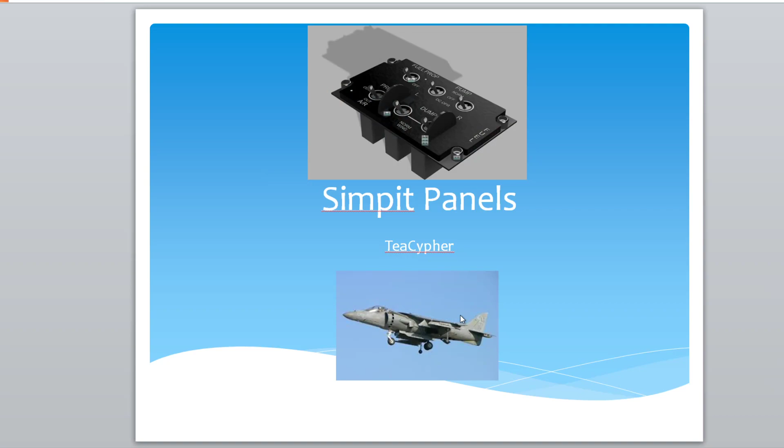So, what we're going to be looking at. Just to recap, we're working towards creating a Simpit panel, and this is really just about teaching you some of the principles of design and sizing and such like, and how to read some documents. So this is our target: I'm doing the AV-8B Harrier for DCS. So going forward, this is what we looked at last time. We looked at what I considered the Bible back then, and just looked at some of the research. And then this time we're looking at the actual metal plate.

Okay, so for starters, I would like to just make some clarifications and amendments to the previous episode. After some feedback from various users on DCS Forums, they brought to light some problems with the Bible document I've been using, as shown here. I still fundamentally think it is a good document. It's just got some errors in it, and part of that is down to, put simply, it was written by someone who works in metric and didn't get the conversions across.

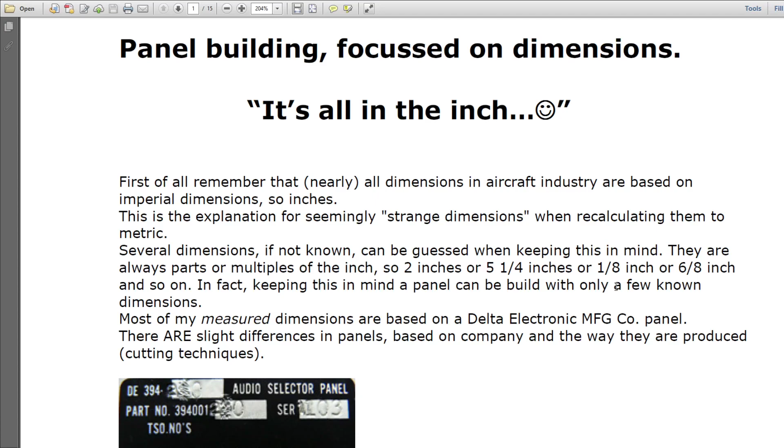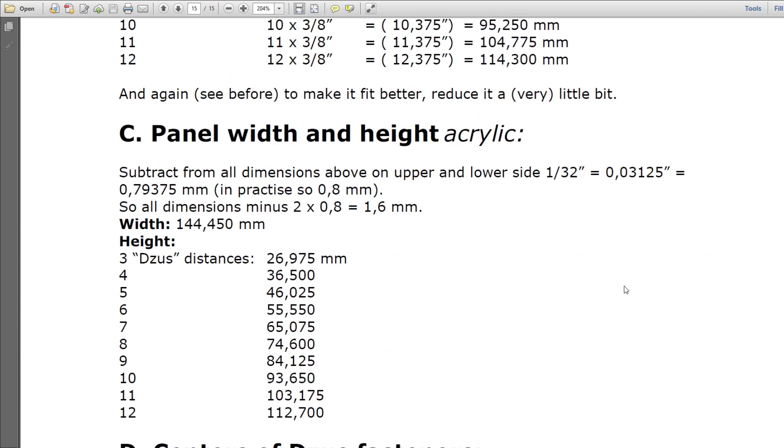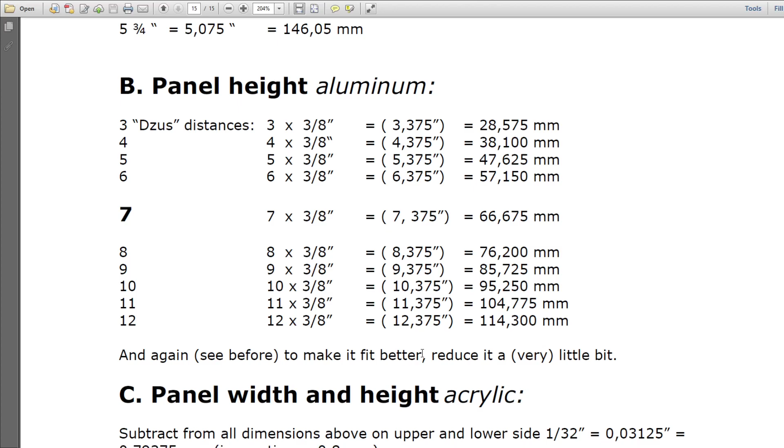So the big ones that I've noticed, and I'll go into detail why I believe there to be errors. If we go right down to the bottom where the appendices are, 3/8, there's a problem here. If you look, he's gone 4 times 3/8 and given a result of 4.375 inch. That's incorrect. That's an error in the maths. These numbers here are correct. Okay, so the actual metric values are right. It's just the imperial values here are wrong.

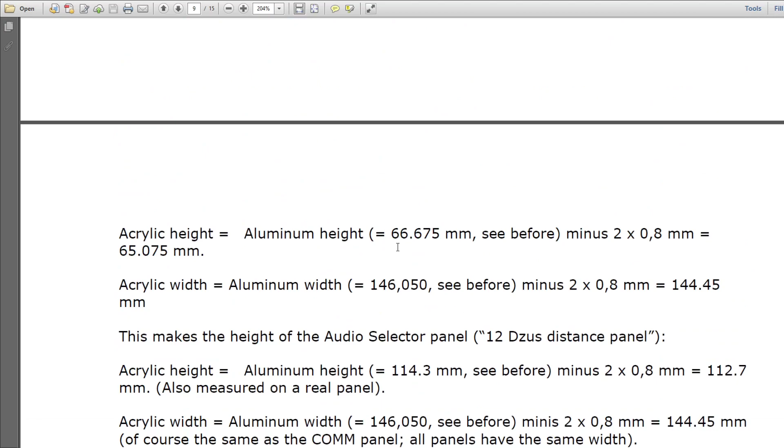Also, I've found that there is a discrepancy between the suggested width of the holes against the mil standard, and I'll show you the mil standard in a minute. Yep, so this value here doesn't quite work right. So I'll bring you next to the mil standard. So this is the mil standard that is for the design of panels.

And as I said, I've had feedback from other users, people who've got hands on real panels in America. I will say that in the UK it's very hard to actually get hands on panels, I find, and particularly the AV-8B Harrier, there's maybe 3 of them in this country, and most of them are hanging off roofs, and you just can't get into a cockpit to measure anything and do any direct real measurements.

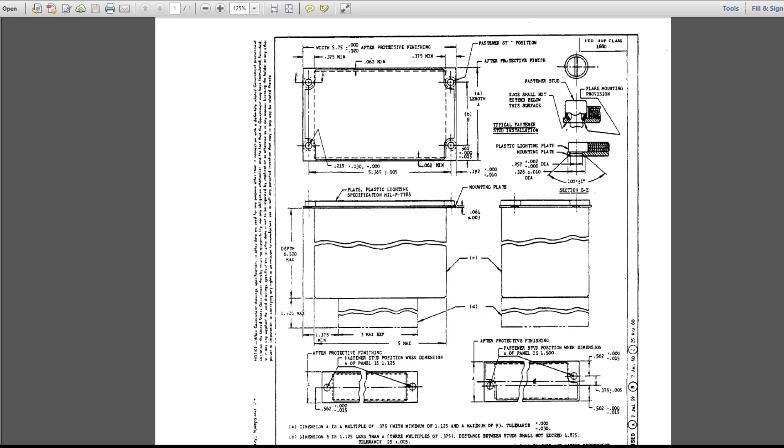Okay, so this is the actual mil standard. It's mil standard MS25212 Charlie. This is actually a rescinded document now, so it's no longer up to date. As you can see, it's okay. It's not the best of quality though. So what I've done, for my purposes and to be friendly to the community, I've metricized it here. Okay, and some of the main things to notice is this after protective finish, just how you read a technical drawing. By trade I'm a design engineer, so technical drawings are my bread and butter.

You'll notice you've got 2 numbers here, 146.05 and 145.542. That means the dimension can be anywhere between those 2 values. In the original document it talked about a width of 5.75 plus 0.000 minus 0.020, so that's why this 146.05 is actually 5 3/4 of an inch.

Yep, and the other very important thing to note is this after protective finish. So this value here is after it's been painted, it's got a protective layer on and everything else. So when we're dimensioning, we need to make sure we have smaller dimensions so the paint and stuff doesn't go beyond this region. Talking to my contact, he tells me that the measured width he normally reads is 5.74 inches, which is less than the 146.05.

So on this side I've done a reference to the original mil spec. I've copied the stuff for the plate itself. I've not worried about the actual depth of the boxes or anything like that. If you really want to go into that, you can go to the original mil spec and have a look at this. I will hopefully put a link to both these documents in the description.

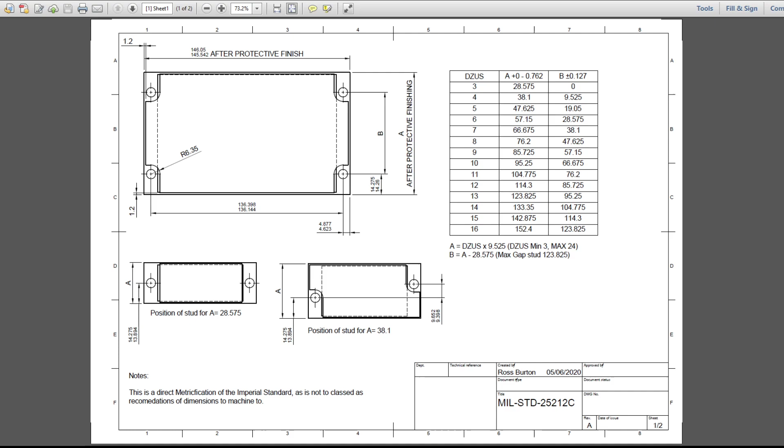Okay, so just moving a bit forward with this little document I've done before we go into the actual presentation. If I scan down, what I've done on the second page is what I'm going to be using for my dimensions. So I've gone, okay, that's what the mil standard says. These are the values I'm going to be using, and these are based on having a 0.2 millimeter gap on all edges, so 0.4 millimeter gap total once you add those together prior to painting.

I did a little bit of research, and I believe that with paint, 2 layers of paint and 1 of spray paint, this should still fit together.

Talking about this value here, so this value here is basically the reference between the center points of the holes, because that's how you mount things, and this distance here sets the reference here. In the document it's referenced from the bottom. Now my contact actually tells me he finds the gaps normally at the top, so that's an interesting little fact. So yep, something to be aware of.

And in all honesty, when I do my panels, I'm not going to use this. I'm going to choose to use a symmetric reference to ensure we have the same gap top and bottom. That's my choice. That's a choice you have to make. So again, like I said, this is just a set of dimensions I'm going to be using. I haven't had a chance to actually physically test this, so it's your choice. You could choose to make them slightly smaller, up to you.

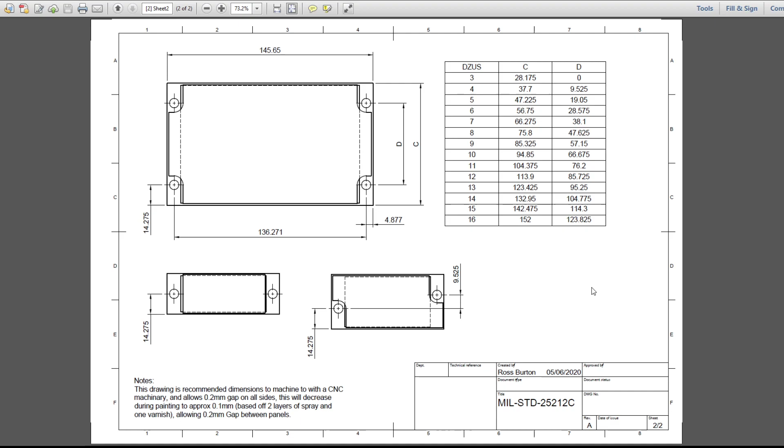So back to what we're doing in this particular one again. So that was the clarifications and amendments.

So I did mention I'm a design engineer by trade. I've been doing it for 15 plus years. I've used programs such as SolidWorks and CATIA, very powerful, used in aerospace industries and other industries. For this, we're going to be using Fusion 360. Why Fusion 360? Simple, it's free to hobbyists. So you can't use it for commercial gain, you have to pay for it to go commercial. But as a hobbyist and someone doing it yourself, it's free. It's not as good as SolidWorks or CATIA, I don't think, but it's close enough and it does enough for what we want to do.

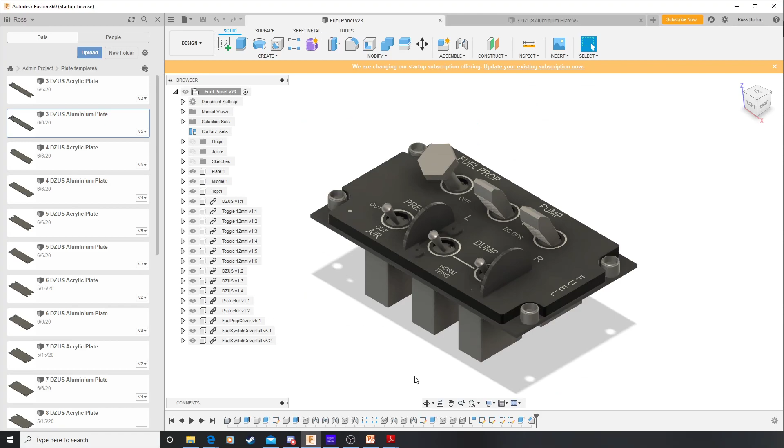So looking at Fusion 360, this is what we're aiming for. As I said before, I have already created a panel. I'm actually going to amend it because since I mentioned your design, I actually designed this to the wrong values. I designed it to the max values and not the ones to account for painting and stuff. And there were other amendments I want to make to this design, so I thought I'd step through how we do it.

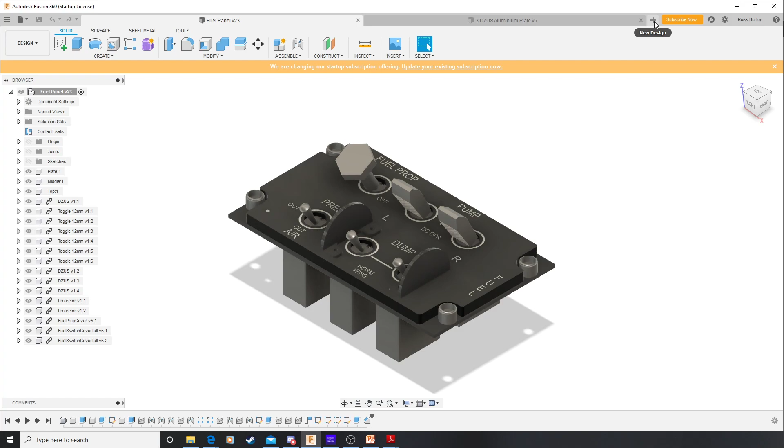So first things first, creating a new drawing. So what we do, you should open up, when you open up Fusion 360 for the first time, it will say untitled document. You can create a new one by just clicking this new design here. So from that I just need to quickly bring up my document for referencing purposes, put it to the side.

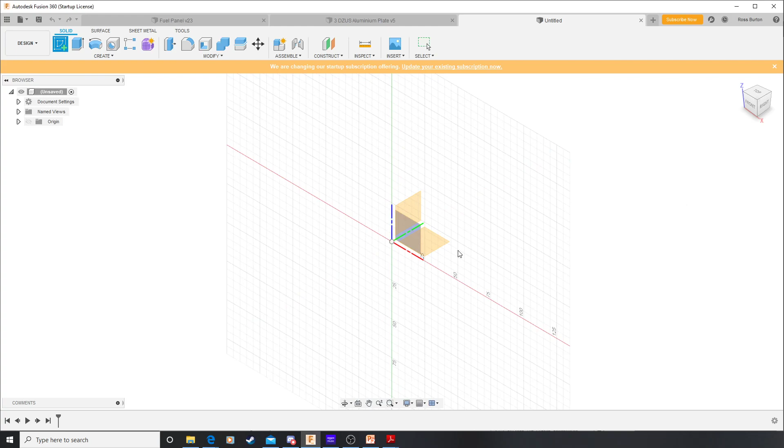What we're going to do is we're going to create a drawing. So in this section here we see the features for creating parts. So I'm just going to create a new sketch, and I'm going to put it on the top plane, which is this one just here.

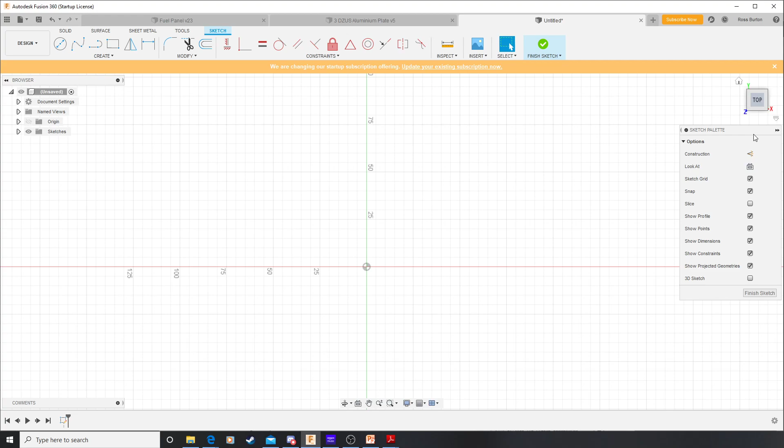Now, when we're modeling stuff, we normally have 3 planes: top plane, side plane, and front plane. And we have 3 axes: x-axis, z-axis, and y-axis, as can be seen in the little drawing up here.

Now what we're going to do is create a simple rectangle. I'm going to select this 2-point rectangle tool, one left click, and drag out a square. You'll notice it's giving dimensions, but that doesn't matter at this point. We're going to dimension it separately, and there we have a basic rectangle shape.

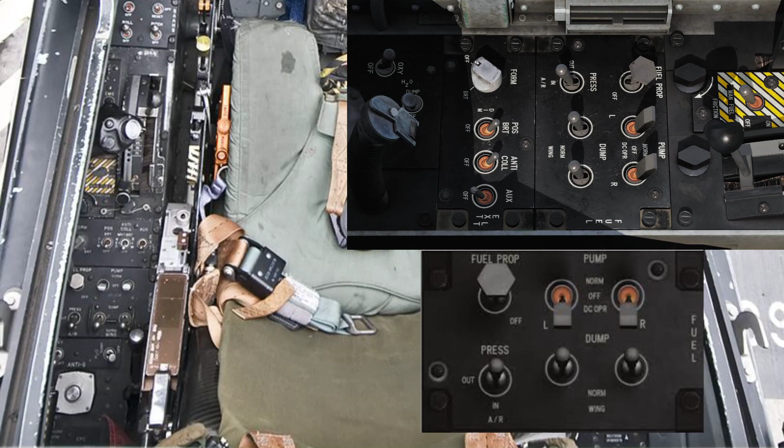So for the part I'm doing, I've had a good look at this and decided that the actual DZUS count for this is 9. Going back to my document here, I can see that I need a C height of 85.325.

Going back to Fusion 360, we select the dimensioning tool. Click on there, and we've got two ways to dimension. I'm going to show you both. First, probably the way everybody would come to dimensioning stuff: you just click on the line you want dimensioned, drag it out, and click. Now you have the dimension. The C height is going to be 85.325 millimeters. Bang, there we have it, the first dimension.

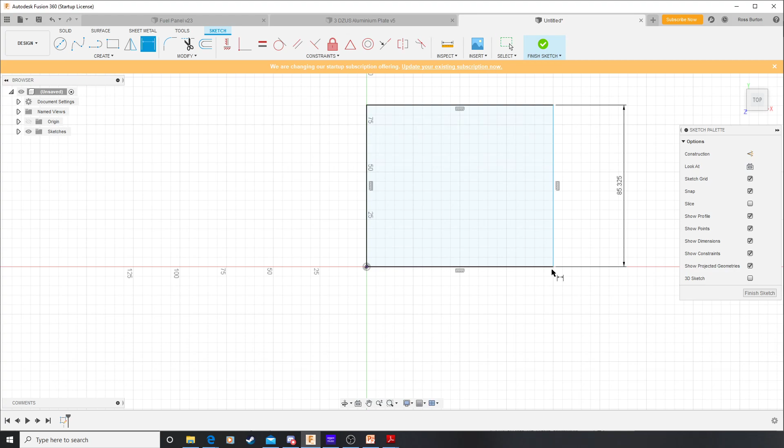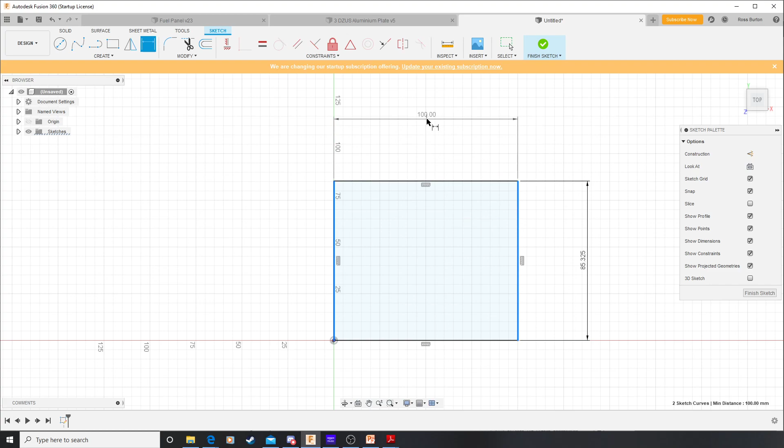The next dimension we're going to look at is the width height. For this one, I'm going to show you a slightly different way, my preferred method, the way I was trained as a designer. You select the first side you want to dimension between, then select the second side. Bang, then click up. So there we have it. For that we're going to use 145.65 millimeters. Bang. Now if I click Finish Sketch, we have our basic shape of our panel.

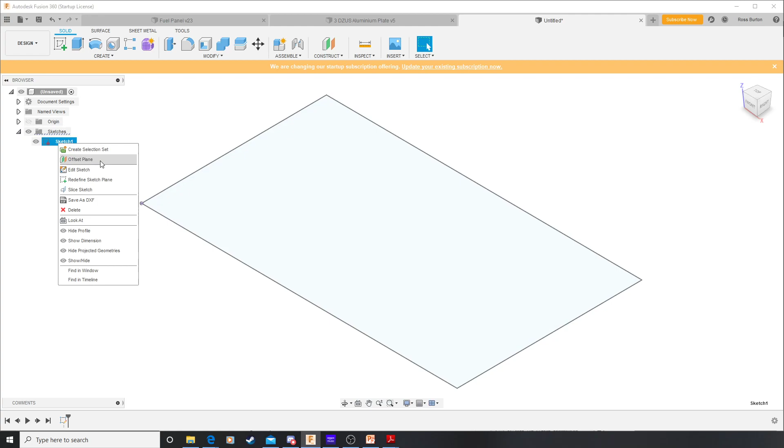Now, how to edit a sketch. You've got two ways: you can right click here and click Edit, or right click down here and click Edit. I'm going to do it at the bottom, it just seems to work better for Fusion 360. As you can see, we're back in the drawing.

The next thing I'm going to put in is the holes for the DZUS, which can be seen. I'm going to click around quite a bit, just here, here, here, and here.

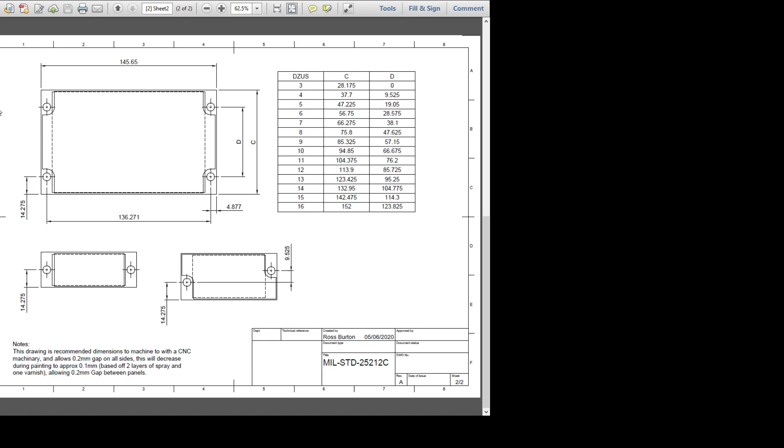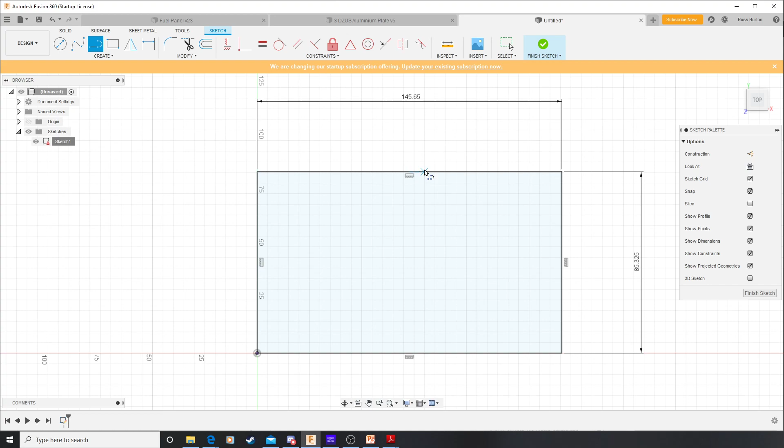So what I'm going to do is start by doing something slightly different. I'm going to draw some construction lines in. I'll find it, and you see how this little triangle shape appears above the cursor when I roll across the line? That marks the midpoint of the line. I'm going to bring a line all the way down and select there, and do the same on the side. These are for construction purposes. If I click Escape and then click on both lines, Control to select both of them, I can then on the right hand side turn them into construction lines. These are for reference purposes, and I'll show you how I use these in a minute.

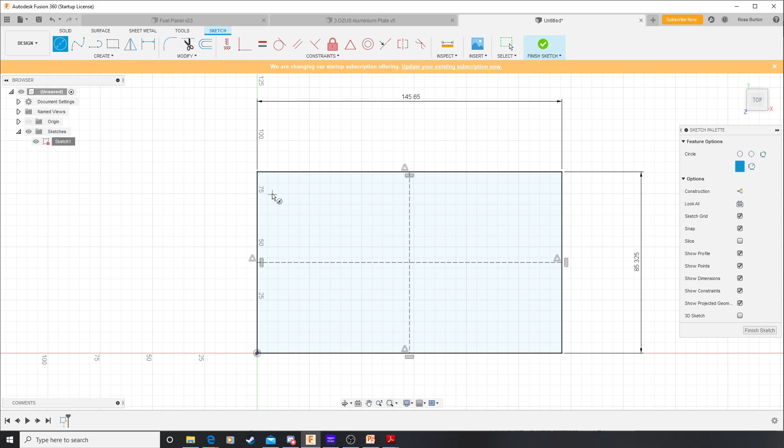So I'm now going to create the actual holes themselves. There we go, circle, bish, bosh, bash. Okay, 4 circles. These are our holes that we're going to be mounting the plate with.

So I'm using an M4 screw with a tight clearance fit. That tells me it's 4.1 millimeters. You can find the clearance value of a screw online, there are various sources. I use a little handbook called Zeus, which tells me the clearances and everything for holes and things. This could be anything from 4.1 for a tight fit up to 4.5, 4.6 for a loose fit. I'm going with a tight fit for this.

Now, instead of having to type in 4.1 four times, what we can do is start to use these constraint functions. Constraints are very useful in drawing stuff. So I'm just going to select equals, select the first object, and select another object. And you can see, once you've done that, they are equal values, so their diameter of 4.1 millimeters is the same. I'm going to repeat that for all the holes.

And with that, if we ever want to change the size of the hole, I can just press escape to leave that equals function. I just have to change it once and all of them change, which is very useful.

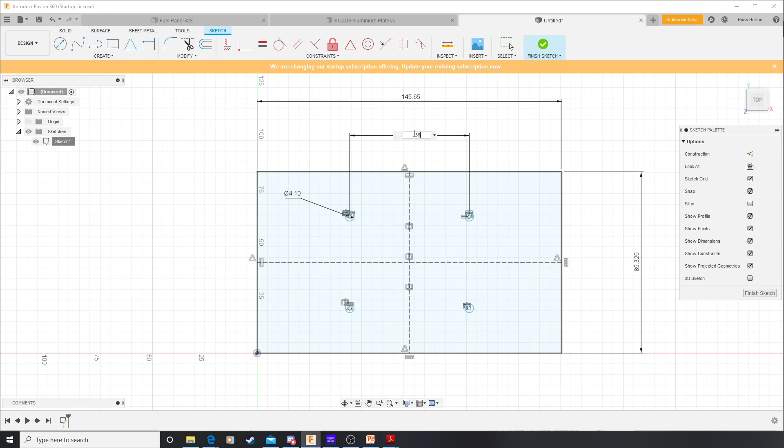Okay, so final set of dimensions, sketch dimension now. I'm going to press escape to deselect the item I've already got, and I'm going to just dimension the distance between these. Looking back at my document, I know the distance between these holes should be 57.15 millimeters. And that's wrong because I'm looking at the wrong number. It should be 136.271 millimeters. And then this height should be 57.15 millimeters. Okay, so now we can see we have our plate and we have our 4 holes.

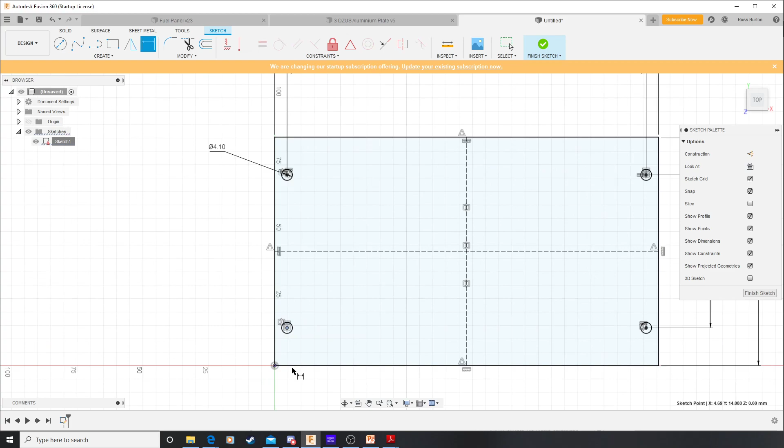Now what we can do is put additional dimensions in here. If I was to drop a dimension in, I'll get an error message saying this is over constraining. Do you want this to be a driven dimension? I can click yes. Basically, what this means is if I change this dimension to something else, it'll automatically correct to show you what the measured dimension is in that case. It can be useful if you're trying to work out things.

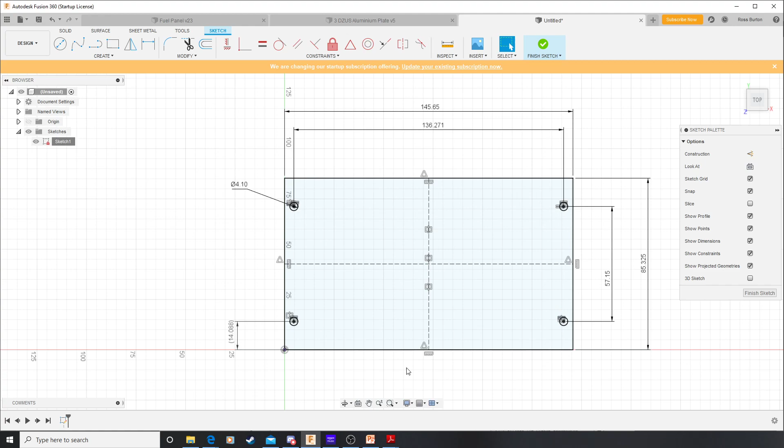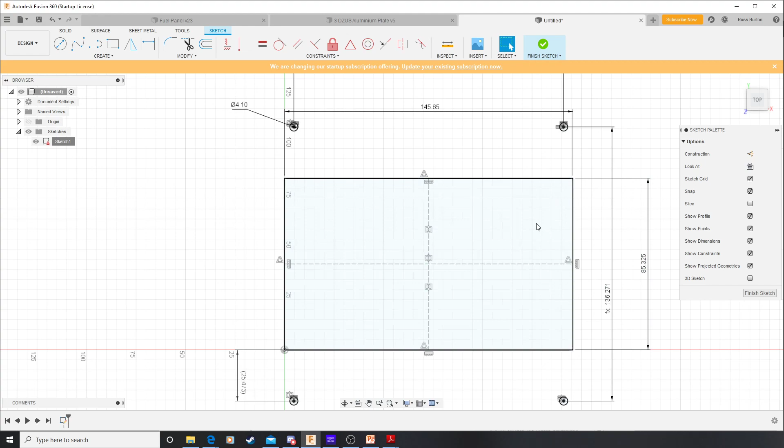And just for reference, you can actually put in dimensions as imperial, so that should be 1 inch, and that instantly jumps to 25.4, which is an inch. Just useful. You can also do formulas, actually you can do 10 plus 10, and you can use brackets and things like that. So it's just a useful way of creating values, and you can actually drive them off other dimensions. You can go, I want that dimension to be that, and then enter, and bang, it goes to that. So useful features with new dimensioning.

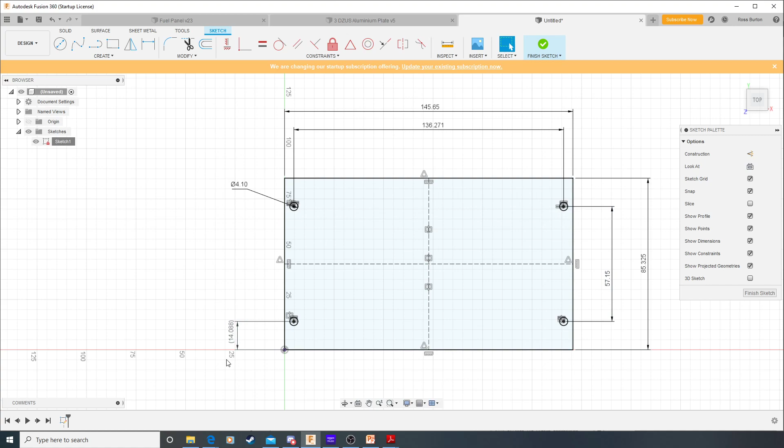Now you can see this 14.088 is not exactly the same as the dimension on the reference document, but this will give us a gap of 0.02 all the way around, which is what I'm aiming for. If you're working with some real panels, you're probably going to have to actually work out where their gap is and adjust this value, and maybe not make this symmetrical across here, but just a simple dimension to create the gap where you need it to be.

Okay, so we have our basic shape, and then the final thing we're going to do is extrude it. So I click on extrude, I click on what we're going to extrude, and in this case we're going to be extruding it 2 millimeters. Bang, and there we have it. It's as simple as that. We have our plate, and we're one step towards the objective.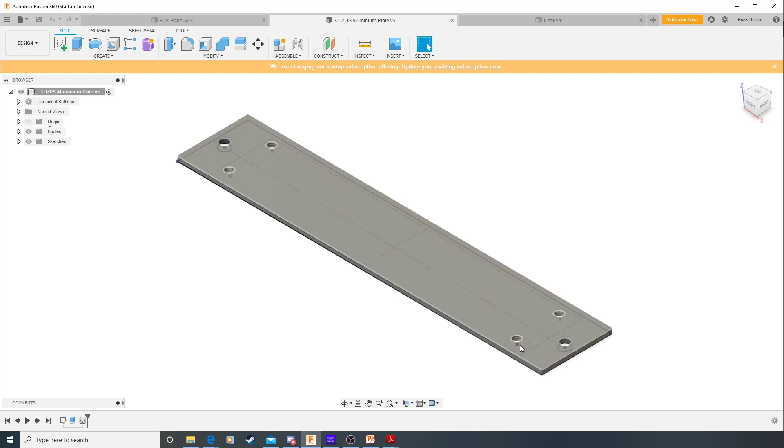What I'm going to do, hopefully, is provide a link to a folder full of an entire set of plates. I have added extra screw holes here, this I'll explain in a later video, is how I'm going to be mounting the acrylics. And I've also added a random point over there, and again this is for future reference and future purposes of my manufacturing process. But I hope you have found this video interesting.